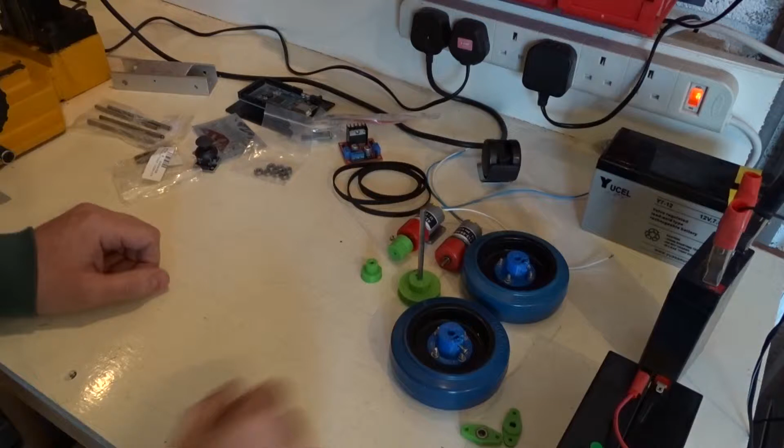Over the years I've accumulated quite a few parts, and I want to start a new project and turn these into some sort of robot, or more likely start with some sort of remote control wheeled car, which I can then look to turn into a robot and automate some features at a later date.

So I raided my parts bin and I've got an Arduino Mega, an Arduino Nano. I've got some of these cool joystick things, a couple of them. I've got some L298 based motor drivers, a few little miniature bearings, some bigger ones as well possibly, some round stock for drive shafts, some Bluetooth modules, some drive belts.

I've got wheels from previous projects I can use, and I've got a whole box full of these motors, 12 to 24 volt DC brushed motors, which I've used in the past, and they're just sat in a box, so I might want to try and do something with them.

I've got an array of batteries as well. I've used these motors before and run them on 12 volts or less. For this project I've got some lead acid batteries which I've acquired, joined together to give 24 volts. These are pretty strong motors at 24 volts, so that should be good fun.

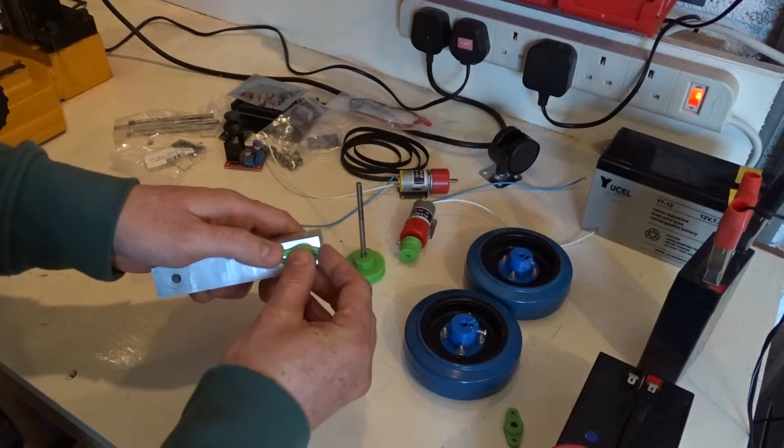I've got some casters and sort of things I've used in other projects that I can use again, or I might make something else. I wouldn't mind getting some different wheels, maybe some with pneumatic tyres might be quite nice, so I can use this thing outside.

And I'm going to try and put all this together bit by bit, and I'll show you what I'm doing as I do it.

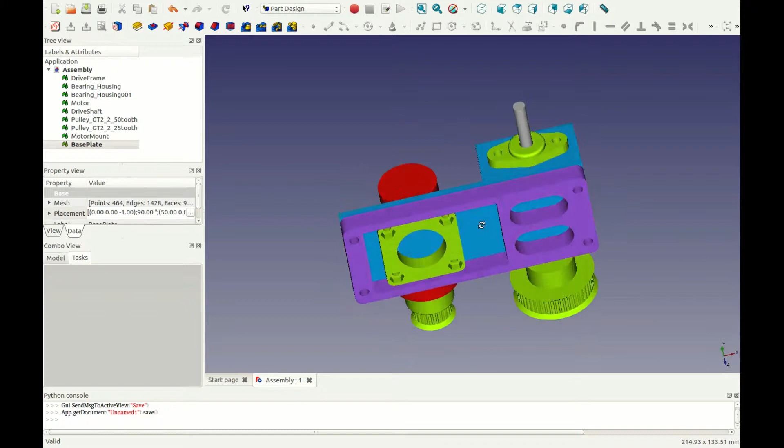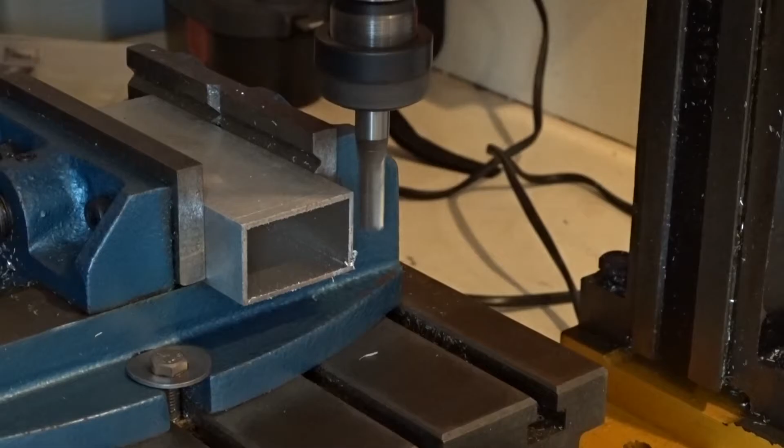So the first thing to do is to try and get some sort of drive arrangement happening. I've used this before, some aluminium box section which I can throw up on the milling machine and shape how I want. I've test printed a few pulleys as well, 3D printed pulleys.

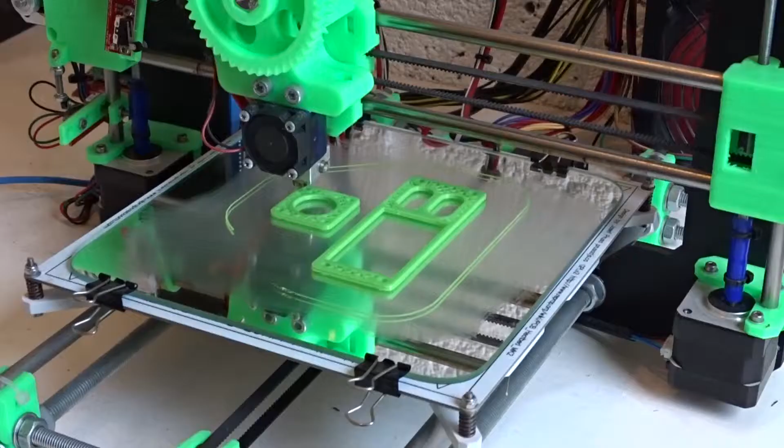Not sure how they're going to work with the GT2 belts. I might have to swap this out for a bigger, thicker, stronger belt at some point, but I'm going to go with this for now. So I've done a few little experiments. I've also 3D printed some housings for the bearings, so these can bolt onto the side of some of this box section and support the axle for the wheel.

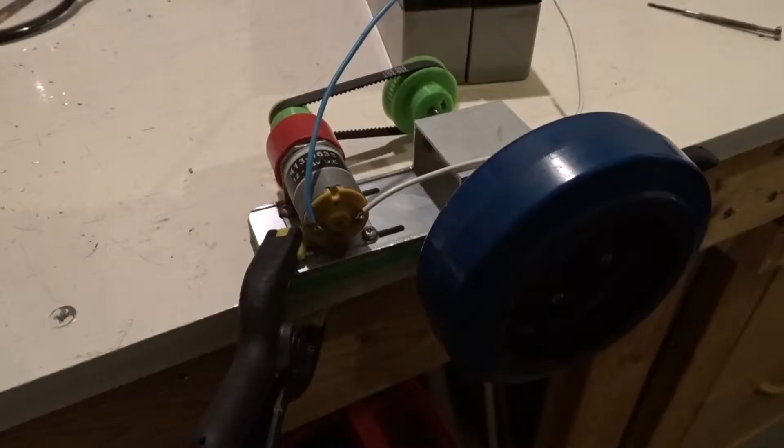So to kick this off, I went onto FreeCAD and did a 3D design, as you can see, using the aluminium box section with some 3D printed parts to form a drive assembly. So it'll be a belt driven wheel, driven from the motor, running at 24 volts. So I'm going to get started with making that, 3D print some more bits, and I'll show you how that looks when it's done.

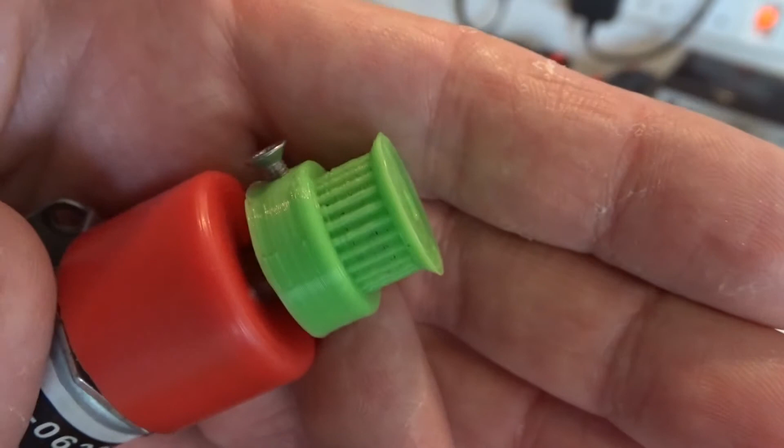Well, I've got as far as mounting the motor, the two pulleys and the drive belt. I'm having a bit of trouble getting the belt tensioned up. I could do with some sort of tensioning device.

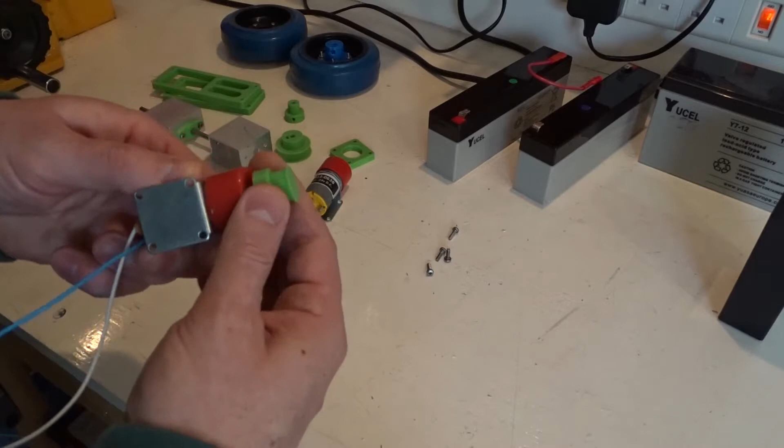It's working. It's quick. The wheel is spinning very fast.

The only trouble with the belt and pulley arrangement is the amount of tension that's being put on the front of this motor, and you can hear that from the noise. It's quite noisy compared to when it's not loaded up.

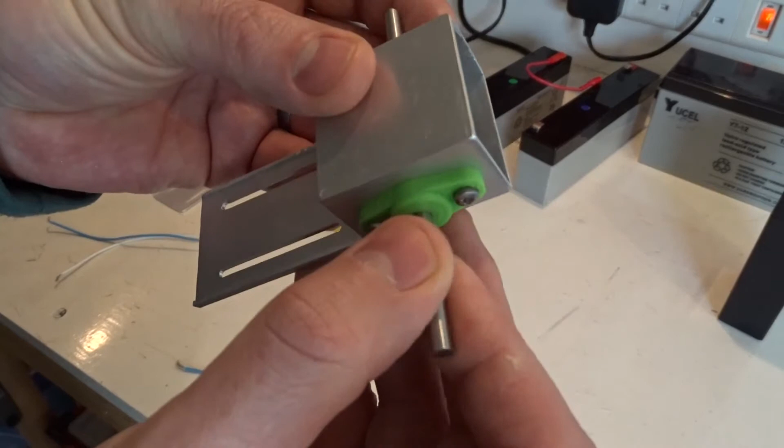Okay, so today's a new day. I've learned quite a bit from the previous test that we did. I really like the design of the bearing housings, and I like using the aluminium rectangular section that we're using.

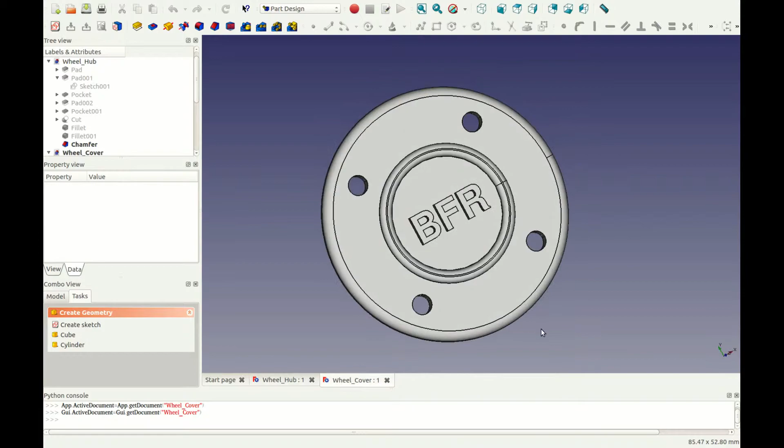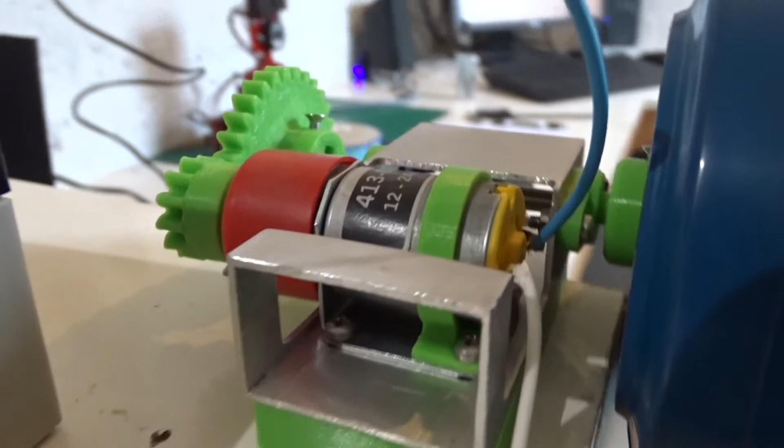Some of the 3D prints came out really nicely, like this little base plate for mounting the motor underneath. The main problem is that the 3D printed pulleys, maybe the way they're being printed, the teeth aren't deep enough, and therefore the belt's slipping a bit. When I'm trying to get tension on the belt, it's putting quite a lot of strain on the front end of this motor, and I don't think it would last long running like that.

So I've got two options, I think. I can either buy some aluminium pulleys and design a tensioning device for the motor to get that belt nice and tight and keep the motor square, or what I'm actually going to do, which is move over to using gears instead. With 24 volts running through one of these, the motor's spinning very quickly, so I want to reduce the speed and up the torque a little bit. With the batteries and all the other weight the robot's going to be carrying, I want to use these bearing blocks to take that load, so I need to gear it somehow.

So in CAD I've redone the design and allowed for some gears, and it actually makes a much more compact unit, as you can see. The gear ratio is about 2.5 to 1, something like that, so it should reduce the speed and up the torque as required. I've also left a little space there because at some point I might want to put an encoder on these, but the goal for now is just to get the drive assembly working, hook up an Arduino to a motor controller and start controlling the motor.